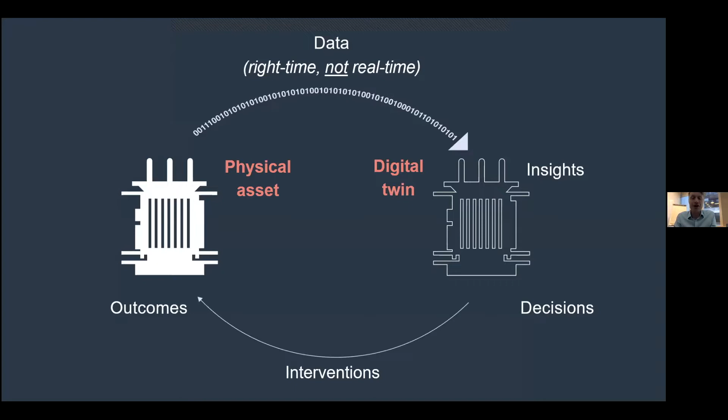The concept has been around for quite a while. And some of the earliest examples of digital twins was actually the Apollo 13 missions back in the 60s and 70s, where they used a concept at the time called digital mirroring to help bring the astronauts home safely.

And since then, we've had an explosion of the concept being used in the manufacturing and aerospace sectors, probably for the last 20 or 30 years. And in the last maybe 10 years, the energy market, which is where I'm from, and particularly the last 3 years in the wider built environment.

Now, the reason for this concept being really excitable and coming to light much more prevalently is that we've had an explosion in storage, compute, and connectivity. Three factors, connectivity of course being things like the internet, but also more advanced and faster connectivity like 5G, that allows that circle of physical to digital, digital to physical, to be brought ever closer together.

The other common misconception we hear when digital twins are talked about is this: many think digital twins are here to replace BIM, building information modeling, part of the broader category of information management. What we know is that this is fundamentally not true, because information management is a core component you need for a digital twin to reach its full aspirations and full set of value.

That's why many of us in the industry as a whole are starting to term this more as a digital twin approach. Approach is the key word here, meaning a digital twin is a methodology and not necessarily a technology, so you can't just buy a digital twin to solve your problems. A digital twin is really about how the physical and digital worlds converge, and how you can use data throughout the life cycle of your project or asset to enrich these two worlds to connect and deliver benefits.

In that concept, we might also consider this: if you look at digital twins, most people focus on that unicorn at the end of the journey, a fully autonomous asset that's all singing, all dancing. But what we know is that's quite expensive to get to, and the technology isn't necessarily proven yet. What we often see is organizations fail to realize there are steps of benefit and value along the route that can be unlocked as you start moving towards a digital twin.

This really speaks to the fact that a digital twin is a journey and not a destination. It's something that will evolve iteratively over time, both as the organization matures and as the technology itself matures. But the key around all of this is that they're always developed within a use case or particular purpose in mind.

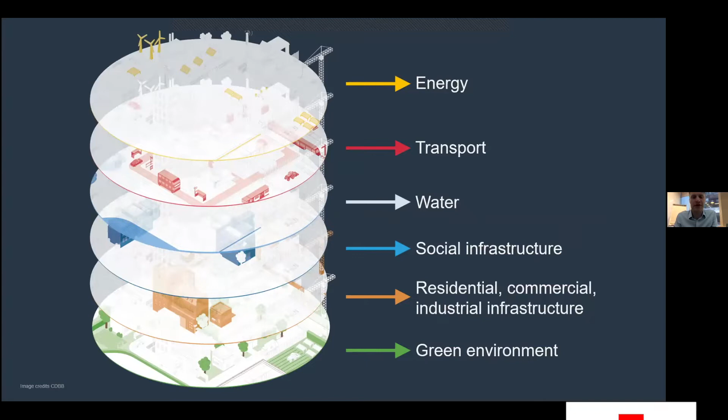But if we could connect these layers together and collapse them, ultimately that would mean being able to create a digital twin of the entire built environment, with data flowing in right time—not real time—to the digital asset, where you can make decisions and then make interventions back into the physical, allowing us to take a real systems-based view of the built environment, delivering outcomes on a social, economic, and environmental level.

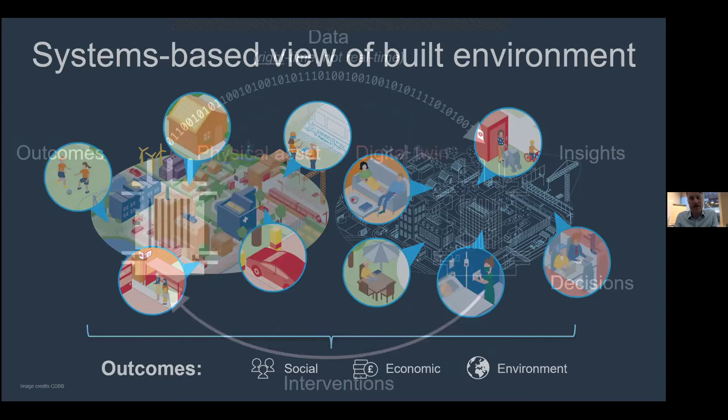Now, what that means in context is if I go back to my original diagram of a twin, and this is my simple generator, if you will, flowing data one way and the other. But let's switch it to a train, which might be more relatable. If you have a digital twin of a train, that's pretty exciting, but if we connect the digital twin of the train to the digital twin of the tracks and of the point system, then you have an information exchange between these three actors.

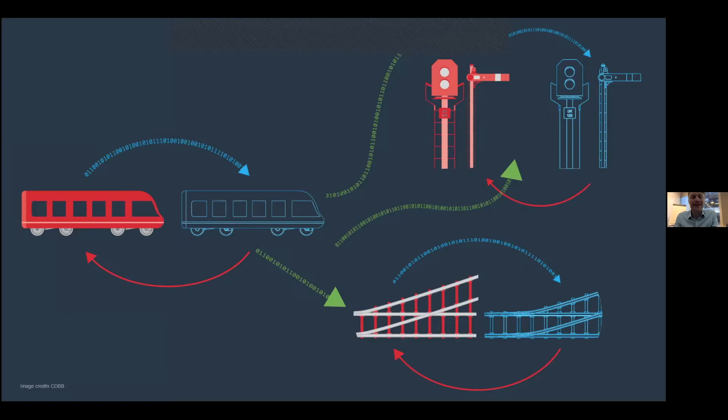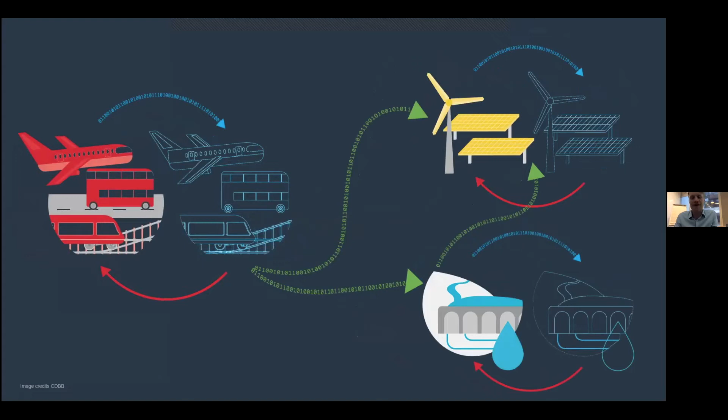But roll that up another layer, connect the digital twin of the railway network to the aviation network and the road network, and again you have even more information that can be exchanged for mutual benefit between these parties. And finally, roll up another layer connecting transportation to energy and water, ultimately allowing us to get to this state of a digital twin of the entire built environment, whereby any single twin in the system, going back to my individual train, is able to benefit and access other information or systems from other twins in the network.

Now, looking at that another way, if we go back to our built environment, what we know is that every year only 0.5% of new assets are built, which means that 99.5% of assets already exist. Therefore, digital twins and the size of the prize isn't actually the new asset at all. Of course, every project being commissioned today should consider a digital twin approach, but the real size of the prize is the existing assets. How can you retrospectively apply the concepts of a digital twin to these assets to unlock value? Now, how do we go about doing that?

And that's the key thing. Ultimately, all under the mantra of this: collaborate on the rules, compete on the game. What I mean by that is that fundamentally it's unhelpful if individual software vendors, technology companies, or consultants start deriving their own version of what a twin should or shouldn't be. Ultimately, twins are twins, and we should collaborate on the core fundamentals that make them what they are, so then we can compete based on the game that we've set.

Now, of course, that is something that's happening, and one of the most prominent publications in this space is called the Gemini Principles, which sets out 9 principles that any digital twin should consider when being created, which are all around purpose, trust, and function. These are guiding principles, and I encourage you to have a look at this document. They really set a fundamental step for what digital twins should and shouldn't be.

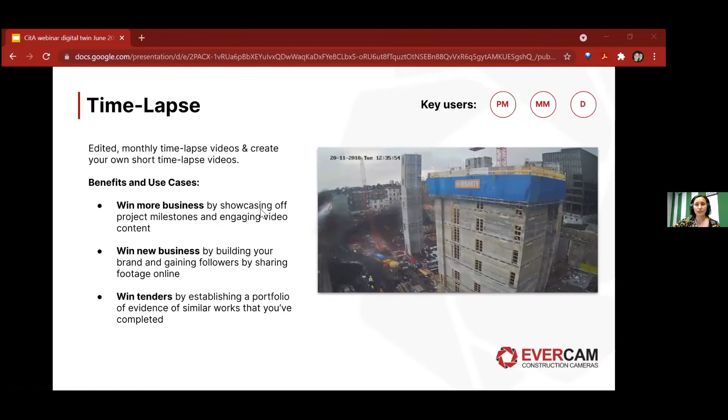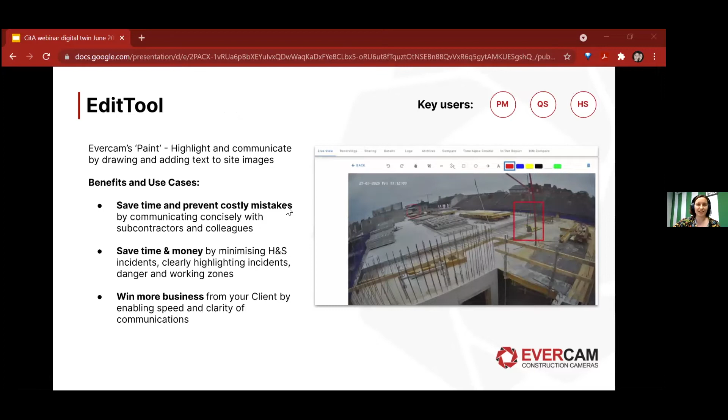Again, we record everything. We store it for the duration of the project and afterwards. And you can always come back, you can always see what happened at a certain date, at a certain point. We create these beautiful time-lapse videos where you can see how the buildings grow. Compare tools can help you see the past and present or any chosen dates. You can zoom in. You can also mark up certain areas and share with your team.

The X-ray is like a small compare. So again, you can see what happened before, how the area looked before, for example, this curtain wall was fixed, but it's only in this small snippet of the screen. Sharing is easy and quite broad. We have cameras where 40, 50 people are looking at one camera from various roles, and each of them draw their own benefits from these cameras. You can schedule regular updates.

And what is super important for us are these various software integrations. We believe in an integrated approach. We believe in standards. We would like the construction technology to speak to each other and to share data from one to the other. Now, what's more advanced and probably much more relevant to the topic of this meeting are these extra features that we are integrating in the camera view. First of all is the integration of the BIM model. On the outside, this is a visual integration where you can see what should have been done, what should be done in the nearest days, and you can also see the camera picture aligned to prove that this has actually been done or not yet.

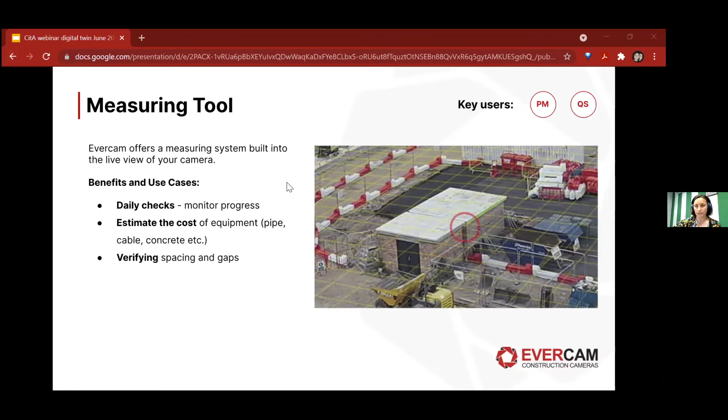Now, what's on the back end of this, from our brilliant software developers, is that they automate this alignment, they also read from the picture what certain elements represent, so that in the nearest future the BIM and the camera will be able to speak to each other and update. The camera picture will be able to update the model and in fact create a part of the digital twin that will represent the true asset. What the BIM tool enables us also to do is to measure from the camera. Of course, this is a tool that mostly serves overall general verification, but it's still nice to see it quite broadly used by quantity surveyors, for instance.

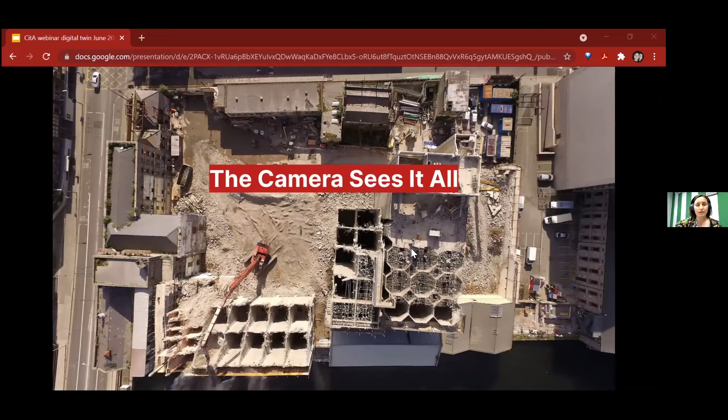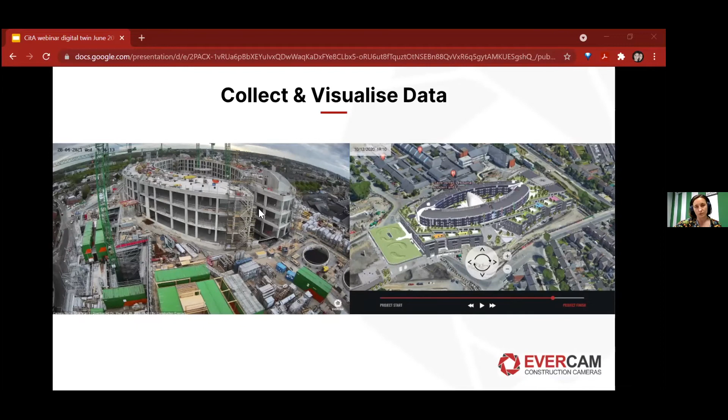Now, again, why does camera work well as a source of data for the digital twin? Camera sees it all. Camera records it all, and we can always draw data out of this recording. What we are doing at EVERCAM is collecting this data and visualizing it in a model, so that this model can be later used to feed into the digital twin. The data that we read can be at various stages of the construction. So we can, for instance, create these areas where we will see what a depot is and how full it is at a certain stage for planning purposes, where we see the areas that will be built, the back office.

This is a visualization that could show the opportunity, the possibility of visualizing the BIM model on top of the site when it's already above the ground.

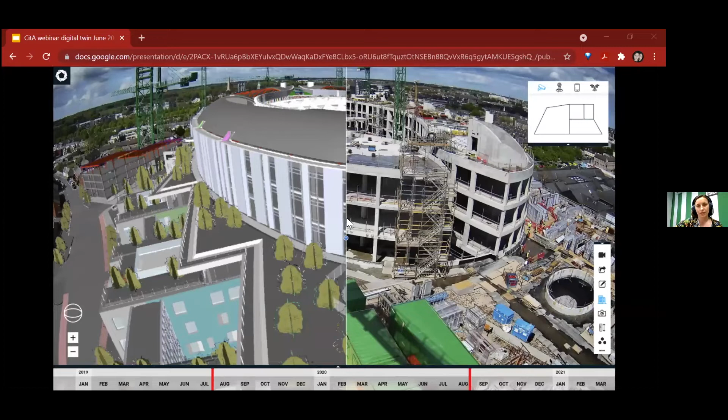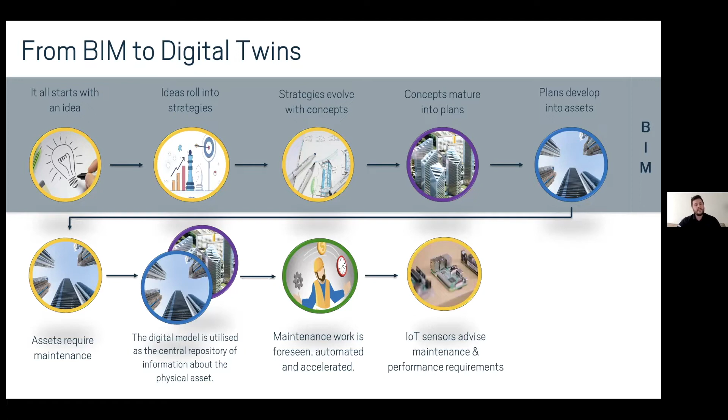IoT sensors will be the methodology to provide the information about the physical asset back to the digital model, hence creating this open communication between the two. And therefore, facility managers can really utilize the 3D model to plan and review the required work. And that's digital twins. So there is a point in time where they get introduced, but if you don't consider them at the BIM stage and at the design stage, you can see how that would fall down.

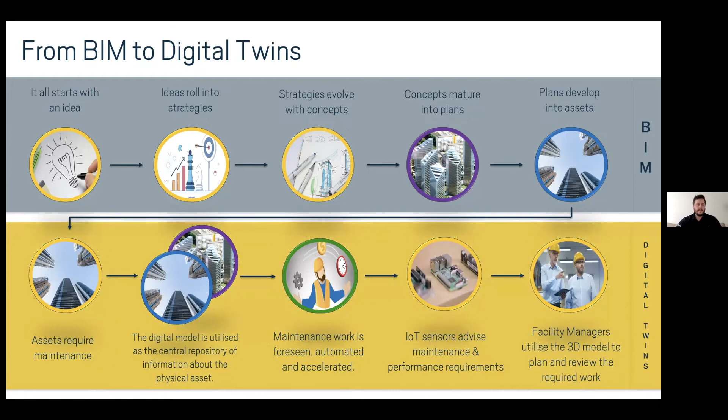So let's just take the preparation for digital twins. We can define an architectural roadmap. We can talk about what sort of data feeds and what information we want to monitor in our digital twin environment. It might be simulations or predictive maintenance where we can offer best value. And naturally, it can be used on a project to expose just how well that project connects with the current state. And we can look at some of those examples that Simon showed earlier as real-time examples of this.

So the records that are incorporated from these diverse data points, which Natalia has spoken quite a bit about in terms of data population and all the information that we have, well, the benefits exceed themselves. It includes the ability to really test everything I've said. I don't want to elaborate too much because I've said so much already, but let's take that intelligent master data system and the transformative benefits of digital twin technology.

And just to throw it out there, I screenshotted this from you, Simon, as well. Whilst I may have struggled to articulate that sentence myself, I nicked yours. So thank you for that. It's the best way to talk about preparation of digital twins. So I will reuse that.

Sorry, not sorry. So let's talk a little bit about BIM. We're going from strategic definition through to conceptual design. And naturally, the progress of any BIM project is really reliant on information, coordination and the accuracy of it. So BIM maturity is growing as part of the digitalization megatrend. In fact, even the terminology of both BIM and the digital world is up for contention, but the benefits of using BIM are recognized and more BIM files are being created each and every day.

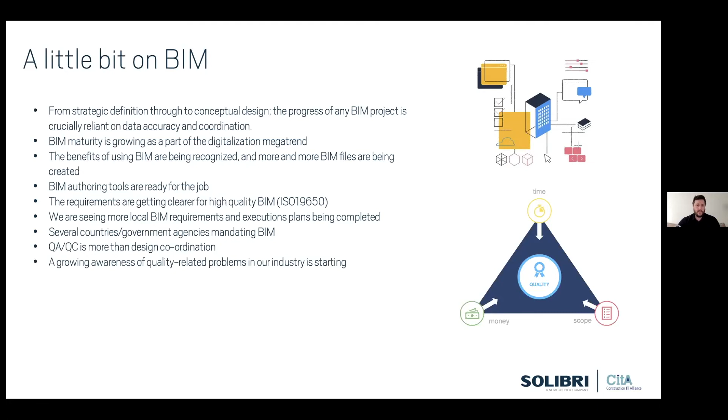So what is quality assurance and quality control? Well, it is a lot more than design coordination. How we prepare for digital twins and how you prepare information for things like COBie and other deliverables, building regulations, standards, fire safety, whatever it is that you're wanting to check, it all comes under that roof. There is a growing awareness of what quality related problems are, and Solibri offers a solution for those. So choices made in the design phase will have such a significant impact on the life cycle cost of buildings.

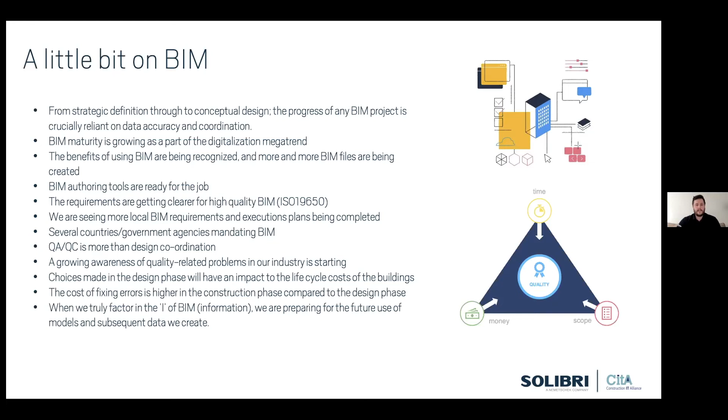And again, the cost of fixing errors is a lot higher at the construction phase compared to the design phase. So let's talk a little bit about the I of BIM, information. And that is really the critical part of all of this and how we prepare for the future use of models and all the data that we create.

So we've seen it all before, all of these different measurements of how we define quality, how we measure quality, what we're doing to review progress in our industry. Well, we've seen lots of different ways in which we've managed to sort of mitigate risk or control quality. And I suppose we'll get into a little bit of detail on Solibri's position on that.

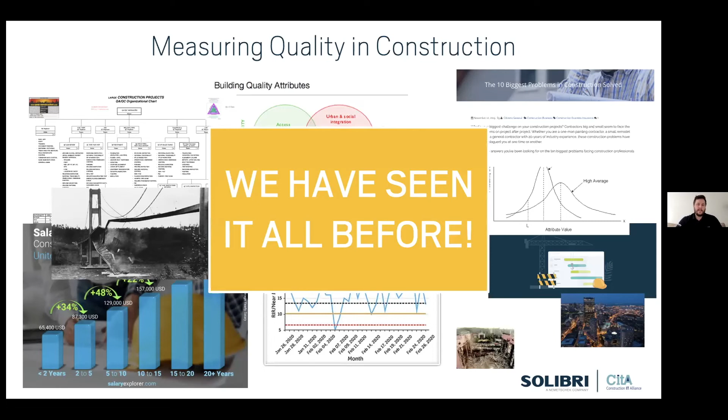So let's talk about measuring issues. Well, we hear this quite a lot. We hear measuring quality is subjective. We hear that it changes from project to project, not having the right information at the right time. And yeah, they're all valid statements. They are things that people are experiencing each and every day, but it shouldn't stop us from being progressive.

And traditional approaches to measuring quality have been to review a project after it's built and to take that building as a physical asset and then review how good a job we did to get there. Very reactive. And the question is, can we actually afford for that to happen? So do we learn from those mistakes legitimately? And can we really let them happen in the first place to learn from them? And have we learned from enough already?

So I'm not going to say that because that line's been said three times already, but the cost of fixing errors is a lot higher. So sorry, that's in there again as well. And it's time to get preventative. It really is. The best attack is being proactive, and that's exactly what we're proposing in this presentation, to be able to identify issues, have a robust reviewing process in place, consider things like interoperability and communication and stakeholders. And that's why we talk about Open BIM quite a lot.

It's because we're talking about making sure that everybody that's accessing this project and the information and the data and everything to do with it can actually access it, and the Open BIM strategy and mentality is really being catered for. So let's talk about accountability. We talk about this quite a lot, but you can take Grenfell Tower as one example of a great concern for safety, and insurance companies are becoming a little bit more privy and conscious about what the workflows are at the design phase for quality.

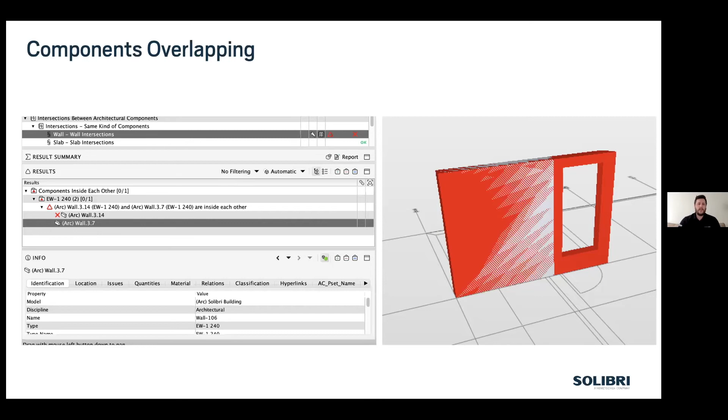There are a lot of other sort of clearance-based checks. It's not just about clash detection. It's about looking at the spaces on either side of those components and defining if they actually have purpose and need to move.

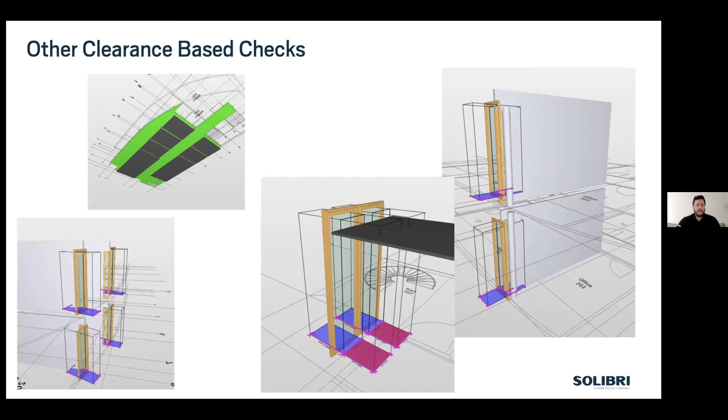So we can take our door components and see what's happening on either side of them. In this rule set on the screen on the right-hand side, columns were protruding through the window space. There are lots of other ways in which these clearance-based checks can be used on a number of components, so we are really checking for all sorts of clearance-based requirements across the model.

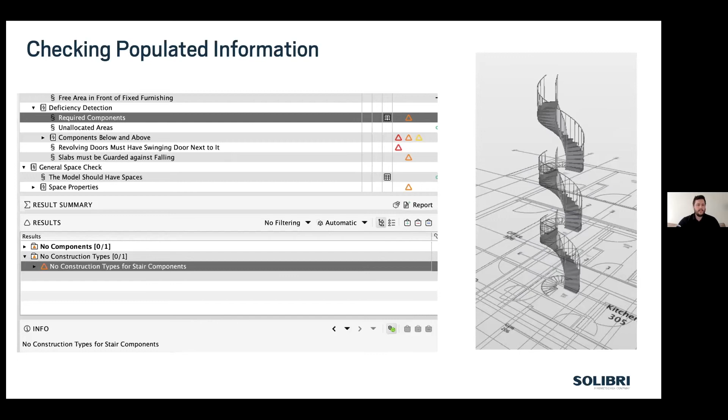We also wanted to get into data—these staircases actually didn't have the proper construction type information for them, so we're doing data-based checks now, not just based on the locations and clashes of those components. These don't have the information that's needed, so it can get flagged up.

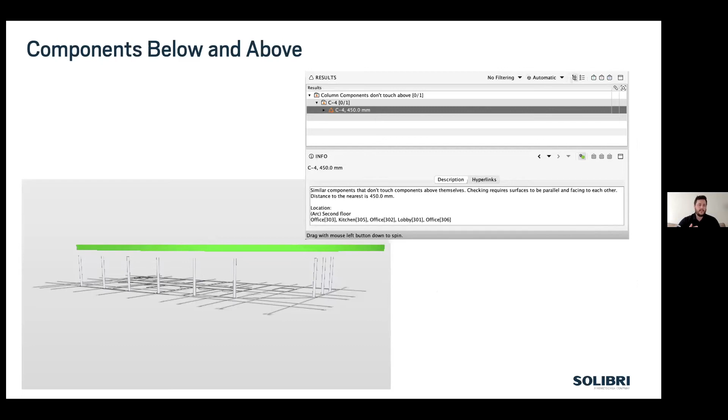These columns are supposed to be supporting the slab above. They're not—it's a floating slab above. So naturally, that's another problem that Solibri's managed to locate using this tool called components below and above, and that can be used across a number of components.

You're not limited—Solibri is a canvas. It's not a blank canvas, because every single rule I'm showing you actually comes out of the box, but it needs to be tailored and adjusted for the project and the way in which you design. So it's a journey and a cultural change, and we appreciate that.

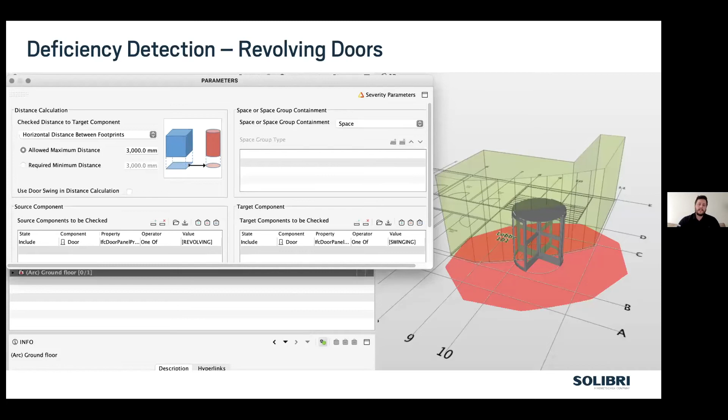Whether it's deficiency detection, looking at building regulation standards to check if there are swinging doors within proximity over a revolving door—there are lots of different things: spatial-based checks, construction type-based checks, space scheduling checks, accessibility-based checks for turning circles in toilets here.

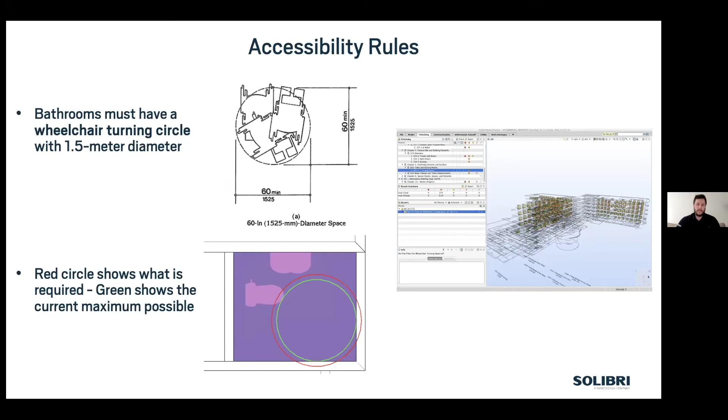As you can see, the radius of the red circle in the purple image at the bottom indicates how big the turning circle needs to be, and the green represents what actually is available. Therefore, it fails to meet the standard of a 1.5 meter diameter radius.

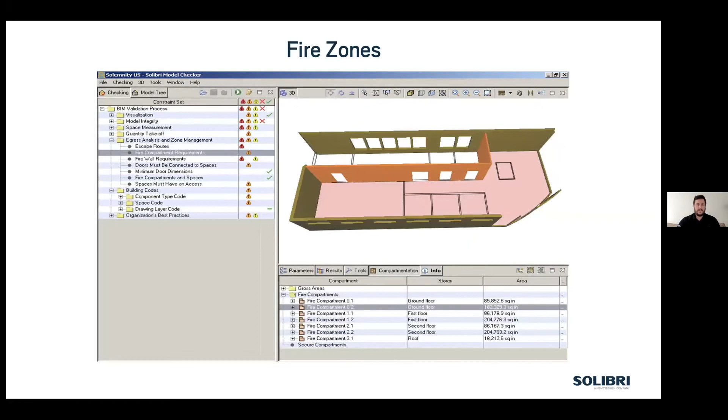Whether we're doing egress analysis, fire stopping, fire safety, fire zones—as you can see here, escape routes, wall requirements, the minimum door dimensions. We can even take missing components into account, so we can say what those spaces actually require from a component list point of view.

And then as things change and get fixed, we might want to see what's changing throughout the project. So there's a ton of different things that you can do.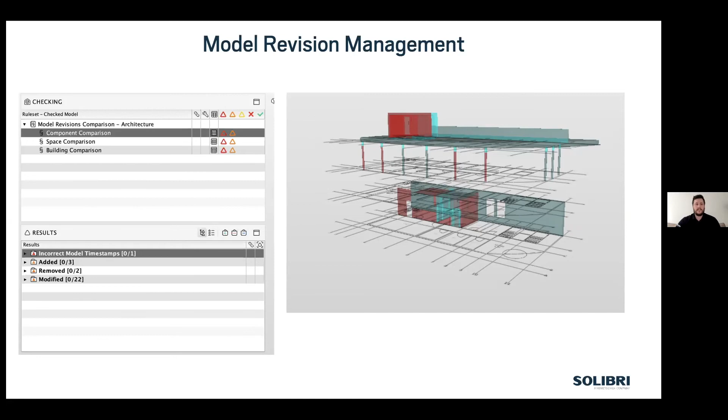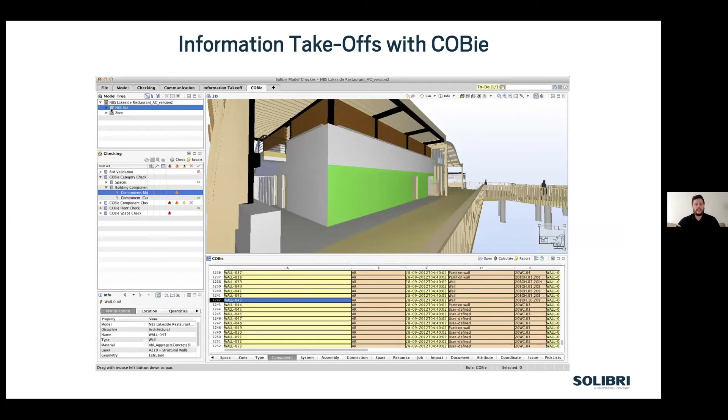That's part of what I offer from Solibri—if you want to start this conversation with us about what we do and why we do it, feel free to have a chat with me. But fundamentally, when we do things like COBie and information takeoffs, if we're not doing all the checks in place to begin with, then how do you validate and ensure that those models and that data are fit for purpose?

We can take quantifying the value of finding these problems—well, I've mentioned that they cost a lot less when they're found at the design phase versus the construction phase, but how much? We can talk about efforts like 400,000 euros saved on a project by finding issues we wouldn't have found before. We can talk about really innovative designs and projects like Wood City in Helsinki.

If you ever want information on these, we've got plenty of articles and videos—I think even B1M have got a video with us based on Wood City. Whether it's Rob Jackson talking about the value of finding issues early on, and the benefits of OpenBIM—he's a big advocate for both OpenBIM and COBie and Solibri, which is great.

So Tim Cox, another example, DFE projects—well, he wouldn't have been able to deliver the COBie data had he not had Solibri in place for 6 new build projects that they were working on.

So this is our community talking, and really just to end with the statement I made right at the beginning: in our advancing digital world, accuracy of data has never been so important, and BIM simply cannot deliver on its promise unless those models are fit for purpose. Subsequently, we cannot use digital twins unless models are compliant, reliable, and accurate.